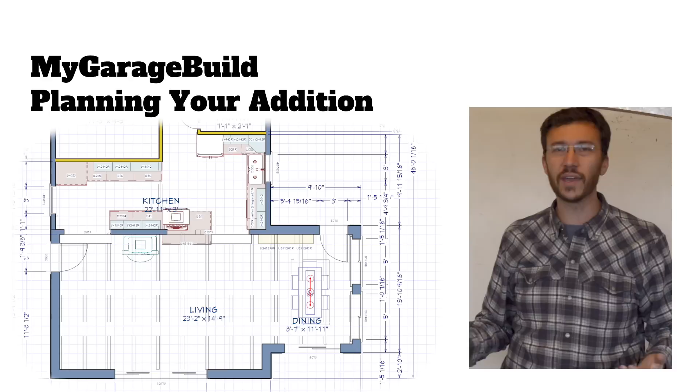First step when you're planning an addition: list out all the family members in your household. Next to them, list out any problems they have with the current house, and also talk about some of the wants they have and some of the needs. Some family members may actually have real needs you have to accommodate when you're building an addition, and you're going to want to have all those listed out.

After you've listed each family member, go ahead and prioritize that list for what's most important to what's least important. Creating this list is really going to help you clearly identify everything you're trying to accomplish in the project and make sure that you're focused in on the absolute most important parts of building your addition.

After you have that list, it might be helpful to think about the future and what might be coming down the road. If you are going to be living in a certain way in 10 years, in 15 years, you're going to want to think about how your family is going to change going forward and make sure this addition still fits with that master plan.

And lastly, talk to friends and family. They may have built additions, see what their feedback is, and really start to hone in on what might be most important.

Part 2: I really want to talk about recouping value and thinking about your home in terms of a permanent thing on this planet that has intrinsic value that maybe you don't want to upset in creating an addition that might be too personalized for you.

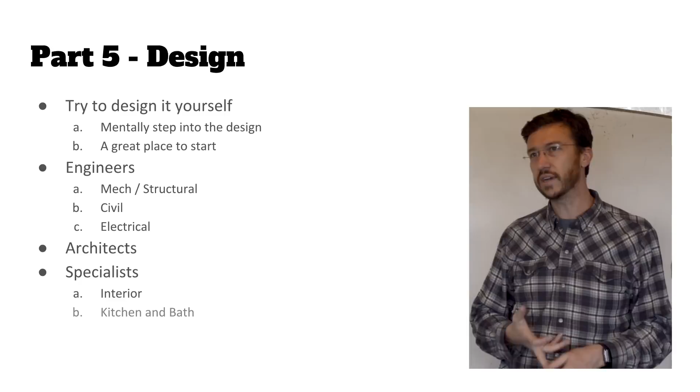There are lots of people involved in design and lots of design as part of an addition. There are engineers, mechanical, civil, electrical. There are architects. There's so many different people that are highly specialized. Landscape designers, interior designers, kitchen and bath designers. Think about the parts of your addition that you want absolutely perfect and the parts that you can afford, and think about hiring people to do those specific tasks and then maybe taking on some of the things that you care less about.

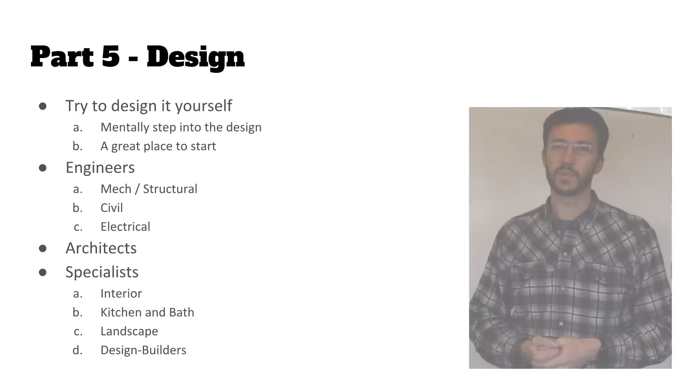The next part I want to talk about the legal aspects of building an addition. You really need to think about zoning. Where you are, there are going to be regulations. Your state may have codes, your fire district may have codes, your town is going to have zoning codes. Make sure you do your homework. That's maybe a good place to start - find out what's required beforehand, and even if it's possible, before you invest too much time and effort into everything else.

The next part I want to talk about is site planning. Obviously, the place where your house is sitting is critical to designing an addition. Sun, wind, cars, and neighbors, right? So where is the sun? Think about how you're going to be in your space during what times of day and where the sun is going to be during those times. That's critical to understanding the feeling of the room in terms of color temperature, but also sunlight and heat, and just how you like to use your space.

You wouldn't put a sunroom on the north side of your house - you have to think about that. But you also want to think about your dining room, or if you're making a breakfast nook, do you really want that on the west side of your house where it's going to be dark in the morning? So make sure you take into account the position of the sun and what the purpose of the room is that you're using, and how it'll feel during those times.

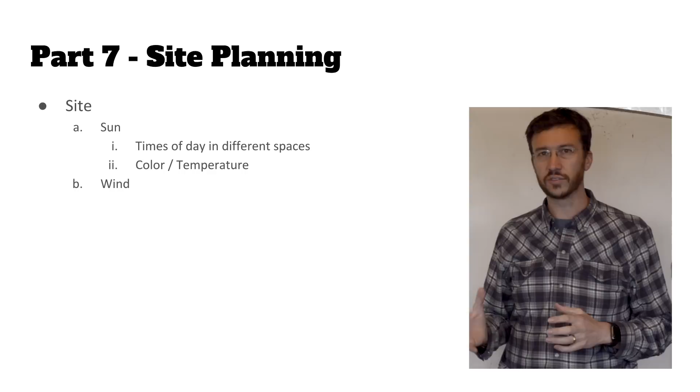Take into account wind. Wind is going to come through and next to and over top of your site. And if you plan on having windows open during a certain time of day, during a certain season, make sure that you don't have an obnoxious amount of wind coming through. Think about cars around your site - where are they driving, what times of day, what windows do you want facing the road versus not facing the road, and what are the purposes of those rooms?

Think about the slope of your property. If you have an intense slope, building on the top side means totally different things than building on the bottom side. So really think about how you can use the slope of your site to your advantage, creating extra spaces maybe for storage or extra spaces that you wouldn't have been able to on other sides.

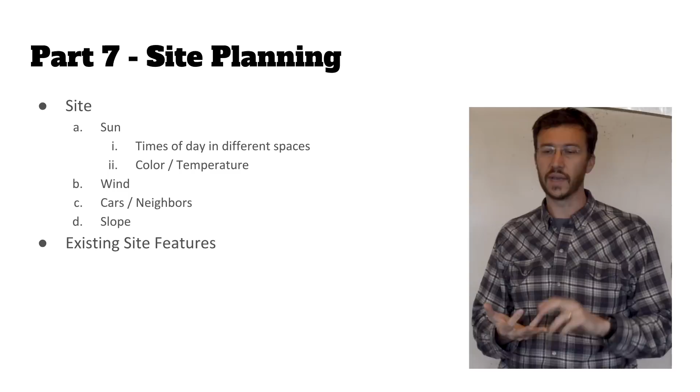When it comes down to designing, really think about your site and may even have to do some research by calling DigSafe. Find out where the buried electrical lines, telephone lines, and gas lines are, where the septic system is, where the water pipes and sewer pipes are if you're on town sewer, and where your wellhead is if you have a drilled well. Draw all of those things into your design from the beginning because those matter the most when you consider an addition that's going to cause you to break ground and expand outward into your yard or land.

Also think about paved areas or really expensive landscaped areas. You don't want to have to tear apart something that was really expensive to create.

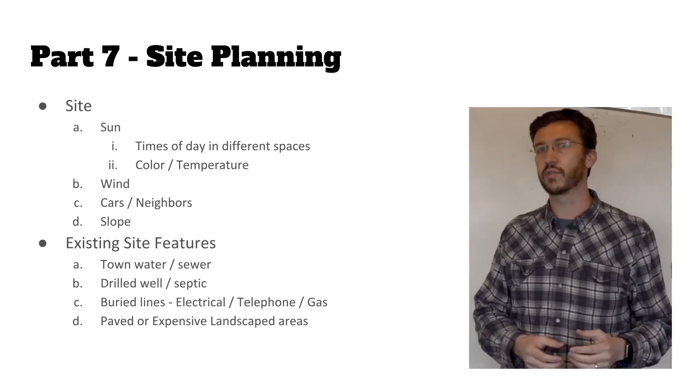The next section I want to talk about is the existing house. Obviously, this is the most important part - it's what exists now, it's what's not working out for you. So there's a lot of things to think about considering your current living space. First, start to think about the internal flow of your house. You enter - you're in what? A mudroom, a kitchen, a living room. You go to where? I go right to the kitchen.

I go right to the pantry. I go right to the bedroom. I go right to the office. Think about how you use your house, and then think about how your guests use your house, and ideally what you would like out of that flow. Think about your morning routine - you get up, you walk all the way across the house to the other end to go to the bathroom, take a shower, walk all the way back to go to the closet, then get out and go all the way to the kitchen downstairs. Think about the internal flow of your house and how each family member uses it, and if there are ways to improve that flow to solve some of your needs.

Consider the key rooms in your house that are really expensive to change - kitchens, bathrooms, laundry rooms. Those all have plumbing, gas lines, big 220-volt electrical lines. Those are really expensive to change. So try to think about those in terms of: this won't change, but what else can? My living room space - can I split it into 2 bedrooms?

Can I remove a wall in between the living room and the dining room and make a bigger open space? Can I think about combining two bedrooms into a living room and then doing something over the garage? Can I change the attic?

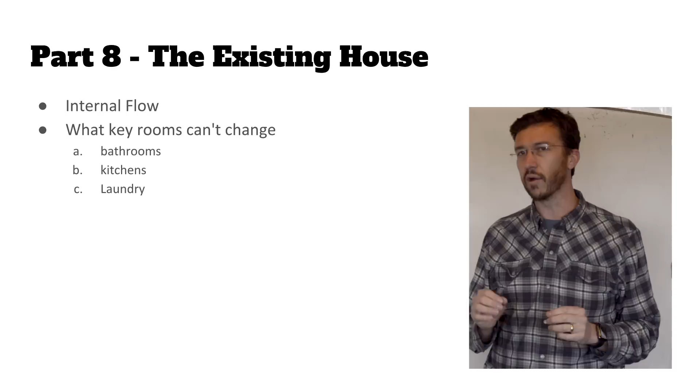There are lots of things to think about with the current rooms in your house, but try to remember the rooms that really are expensive to change. The other really important thing to do is locate all of your bearing walls. That means the load of your house—your second story, your attic, your roof, any snow on your roof—comes down through the structure in different places and in different ways in a lot of different houses. You need to identify the bearing walls.

That will help steer your design and what you can change, what you feel comfortable changing, and what you can't. Take a hard look at your house and think about ways to add on that don't require breaking ground, putting in a foundation, footings, backfilling—all the things associated with expanding outward into your yard. Try and think about ways you can add onto your house without doing that.

Some of those ways are bump outs—a little kitchen nook that just bumps out a little bit adds a little bit of space. Maybe you can change your attic space to be more useful living space. Sometimes in cape houses you have knee walls. Consider putting in dormers, making an additional space inside current rooms. Consider a shed dormer on a cape style house to give you a full height wall the entire length.

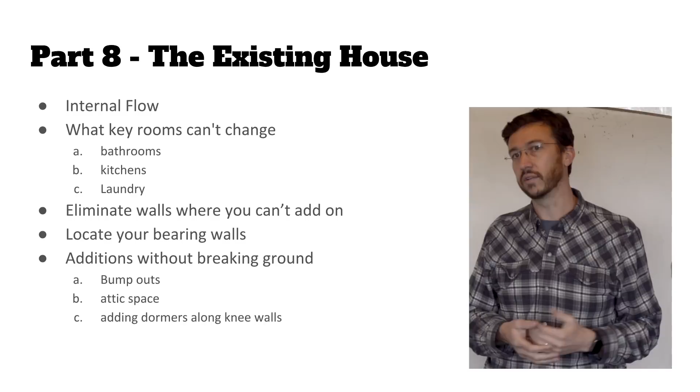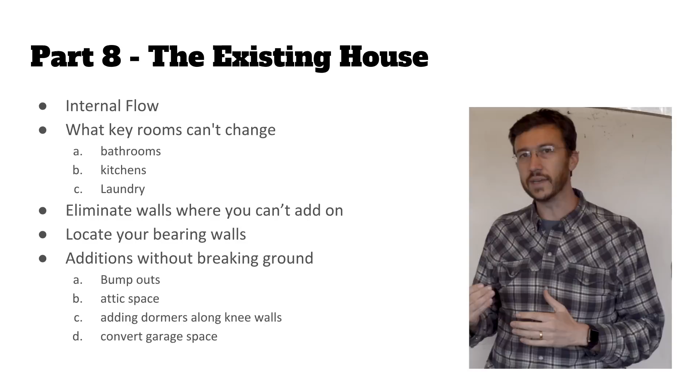Think about converting garage space. If you have a current garage that you're underutilizing, think about converting that to living space and parking outside. It might be cheaper to build a garage down the road if you have an immediate need for living space, and just convert your garage.

So the next part I want to talk about is drawing it out. And arguably the most fun part, and the part that everybody skips to, is just drawing it out. Totally fine. Do it. Draw it out.

You start off by measuring your current house. Get the width, get the length, get every L, every bump out, every section, and measure it all out as accurately as you can. Also, think about the foundation—sometimes the siding will come down and the foundation will actually be set in a little bit. Try and get that measurement because it's important for when you're adding to an existing wall. Try and measure everything you can.

Get the width and height, start to get your walls, and start from a corner and work your way around the house. Work your way down the wall, and if you hit a door, measure the door—this door starts at 72 inches from the corner. Got it. Then measure the next piece, maybe it's a window—measure from the corner to the window. That window is at 112. Okay, got it. And then measure the inside corner.

That way you eliminate any sort of measurement creep, where maybe you were a quarter inch off here and a quarter inch there, and over 40 measurements you're like a foot off. Try and measure from the same point all the way down a wall, get all of the features, then move on from that corner, measure down, and then measure inside walls.

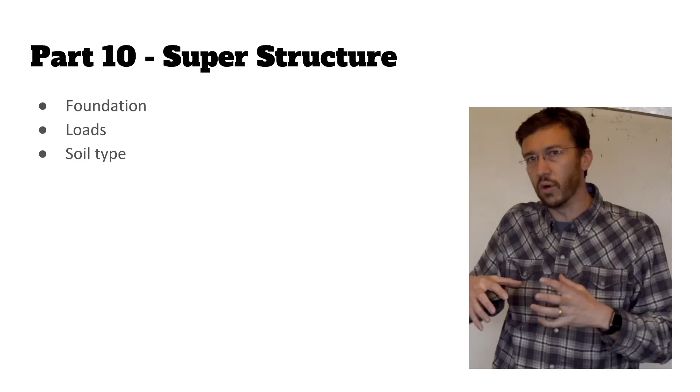If you're building on an upper story, does the current structure have enough strength to hold all that weight above it? It wasn't originally designed for that. If you're putting on a dormer, does the structure have the ability to bring that weight down through it? These are really hard things to figure out.

You can easily do the research to figure out how to do the math, and then do the math, and then you're golden. That's a lot of work, but it's doable.

This is also a great time to pull in a structural engineer. Say, hey, this is what I'm thinking—am I crazy? I want a 40-foot span, I don't want any posts, that's how I want my addition. Well, the structural engineer will tell you anything is possible, and it is. So dream big—anything is possible with enough money.

You bring it to the structural engineer, and he's going to tell you, yeah sure—but those beams are going to cost more than your whole addition.

So maybe start out thinking about those things and looking up span tables to get a rough idea, like, okay, I want a 20-foot span—what kind of lumber is going to span 20 feet? I can tell you right now, there's no dimensional lumber that will span 20 feet all on its own. Maybe 2x12s, 12 inches on center, but you'd still have deflection that wouldn't feel comfortable. So just do a little research and you can find out a lot of information.

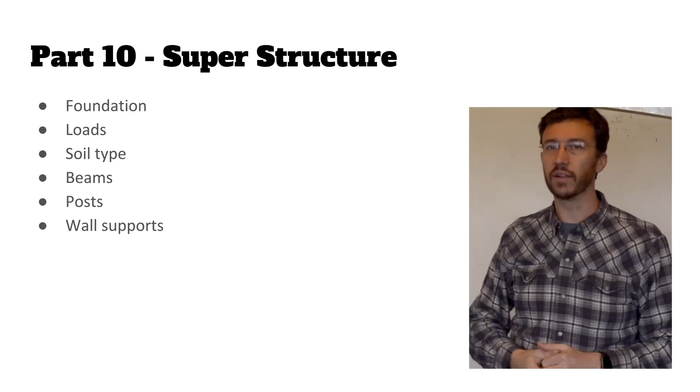So that's a quick video talking about some of the things involved when you're planning an addition. I couldn't possibly cover everything, but I didn't feel right putting out all these addition videos without talking about this major part, which is: how do I start? How do I get started with building an addition? Like, I want more space—well, I don't know what to do.

So I wanted to put this together as just a quick outline to help you target some of the next steps. Down in the description, I'll have bullet points linking directly to the time in this video talking about the individual items I went over.

I hope this gives you the confidence to tackle some of these things yourself. That's what my entire channel is about—I want to put stuff out there and show people, yeah, you can do this. You can do it, even if you've never done it before, like ever. And you can screw up and it'll be okay, and you can do it over and it'll be great. That's what this channel is about.